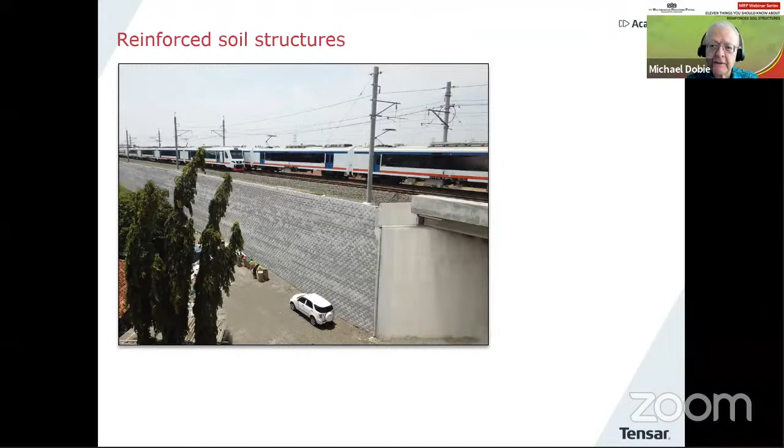And then one last picture. This is actually a load-bearing bridge abutment. That's the sort of structure I want to talk about in the next webinar.

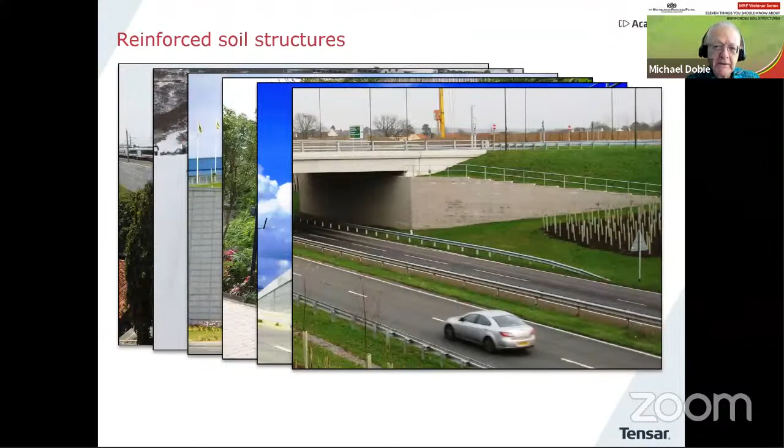So why did I choose this title? Well, it's because I find in working in this field for such a long time now that I think there are a few misunderstandings and confusions about some aspects of reinforced soil. And really, I've picked out 11 things. You might say, why 11? Well, 11 is quite a nice number.

It gives me about 5 minutes on each topic, which means I need to get a move on because I know how many slides I have to present to you today. But I could easily have 11 more. There are many topics that I think require discussion in this particular field, but let's see how we get on with these topics today. As I go along, as usual, these little blue boxes will appear from time to time to make a special point or to maybe ask a question or two. May even be related to the quiz at the end of the webinar.

The material is aimed really at civil engineers who have some involvement in the planning, design, or supervision of reinforced soil structures. I hope the information could also be of interest to more experienced geotechnical engineers or geosynthetics specialists.

I use 3 main abbreviations to save writing things out when I make the slides, so these get used quite a lot. RSS, reinforced soil structure. RSW, reinforced soil wall or retaining wall. And RSB, the reinforced soil block, that's the block of soil that's actually reinforced by the geosynthetic material.

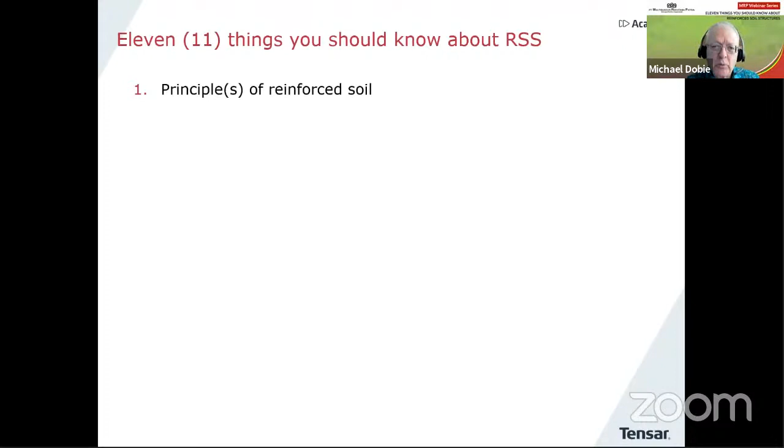I could list to you right now the 11 items, but I thought rather than that, let's just bring them on one by one. So we'll start off with something about principles of reinforced soil.

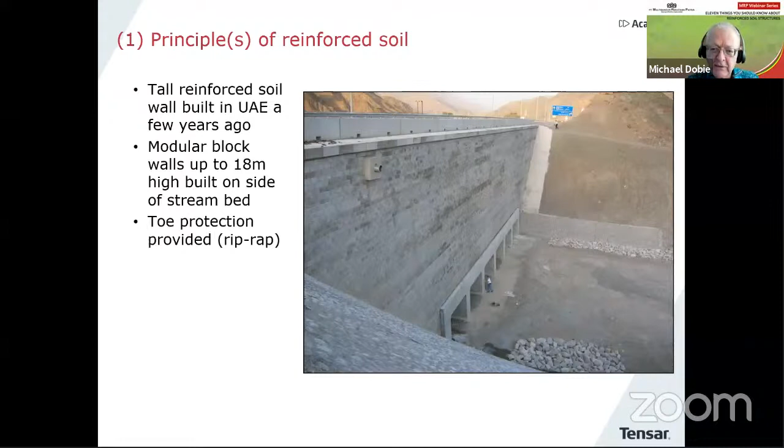Here's a nice picture of a wall built a few years ago in the UAE, 18 meters high, quite big. You can see that the toe has been protected by some riprap because this is a stream bed. And you can see the width of the stream here in another view on the same project, quite a big stream bed.

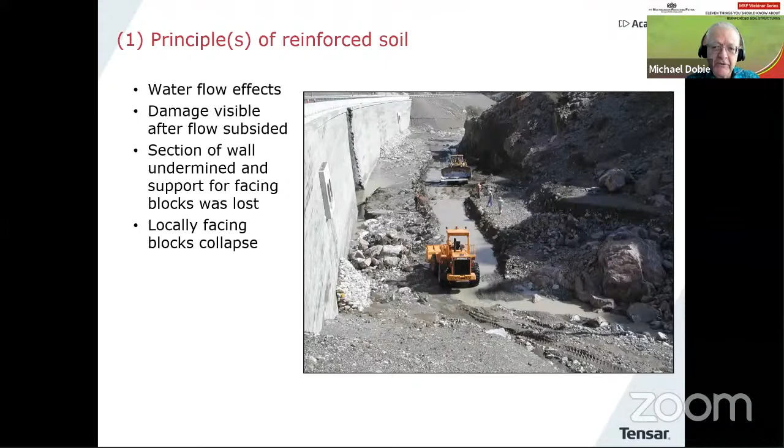Let's just go back to the beginning again. There's the initial picture. You can now see what happened. They had unfortunately forgotten to put the riprap over this section.

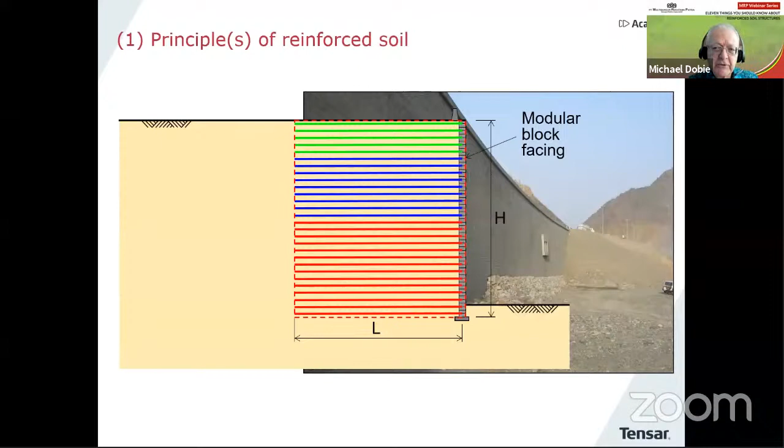If we think about a cross section here, what do we have? We have soil and layers of geogrid, designed to meet certain requirements, and on the front, a modular block facing. Let's just take away the background and look at the cross section. The important point here is that the RSB, the reinforced soil block, is the structure, and it's a composite consisting of soil and geogrid or geosynthetic reinforcement. The facing is there essentially to make it look nice, to prevent erosion of the soil at the facing, and also to provide some local stability at the face.

Unfortunately, what happened in this case was that there was erosion down at the bottom and the blocks dropped down. But what was very interesting is that despite this happening, the highway remained in service and the crash barrier remained intact. We can see it here in this picture along the top, after the facing fell away, and you can see there's no sign of any damage even to the crash barrier.

So this makes a very nice important point about reinforced soil being this composite. What did they do? Well, they repaired it. They put the facing blocks back until it was completed, and this time they remembered to add the riprap to protect the toe from water flows. So I think this is a very nice demonstration of how reinforced soil works as a composite, and also that it can withstand some pretty serious situations and recover very nicely.

While we're on this section, one more point I want to make, because I often see this on drawings: if you have a structure like this, do not pile the facing by itself. Sometimes it's little wooden piles, what we call cerucuk, but we often see them placed just underneath the facing. It's not a good idea.

If you do need to improve the foundation conditions, this should be done by treating the entire reinforced soil block width. So just a few more words about this reinforcement soil composite, because there's some work done here in Japan many years ago.

It was a trial wall, reported by Tajiri et al. back in 1996 in one of the Kyushu conferences. There's a simple cross section: 6 meters high, geogrids 3.5 meters long, roughly 1 meter spacing, with some secondary bits to make sure you don't get a local failure at the facing. You can see there the main properties of the fill and the reinforcement.

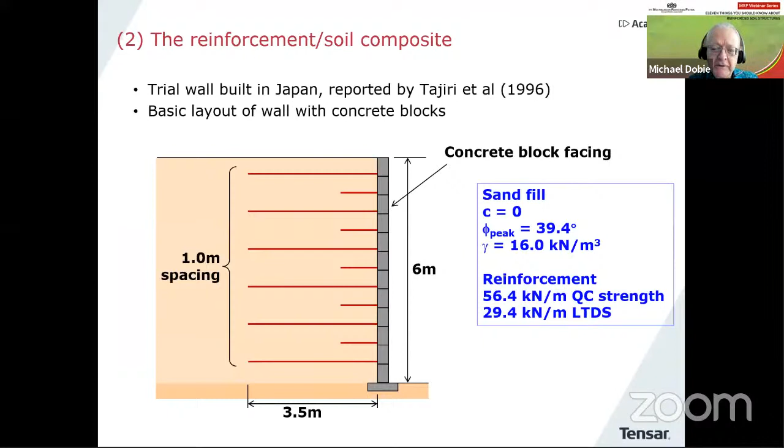Many trial walls were built like this years ago because people were trying to learn about the technique. But what was particularly interesting in this case is that the researchers arranged to cut the reinforcement inside the soil. They did this using electric wires embedded in the fill that could be made hot, and when heated, they would melt through and cut the geogrid. So they gradually reduced the length of the reinforcement. This is really the most incredible piece of work.

There's the first series of cuts, each removing roughly 30 centimeters of the geogrid, and then the second series of cuts. In the cross sections, brown is intact and green has been cut into short pieces, roughly 30 centimeters in length. The next series shows how they're shortening the geogrid further. Incredibly, they go all the way to cut number 60, and then the wall fails. Quite an extraordinary piece of work.

So what are we going to learn from this? If I go into a stability program—a slope stability program—I put in the initial geometry of that structure. There it is, you can see the spacings of the geogrid and everything connected to the facing. Sorry, I've drawn it the other way around, but I'm sure you can realize that. I can use a very nice non-circular analysis technique to investigate stability, which I'll explain in more detail later, but I'll just do it quickly now.

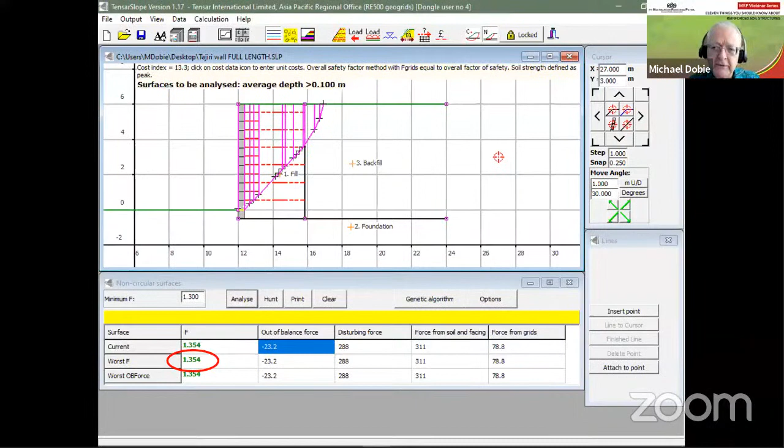But if I now go to the situation when they'd reached cut number 60 and do the same analysis, I get a very low safety factor. The structure is predicted to collapse—and of course it did at that stage. But just prior to that, it was perfectly stable. So there's something else going on in reinforced soil: an additional composite behavior which we're not really taking into account.

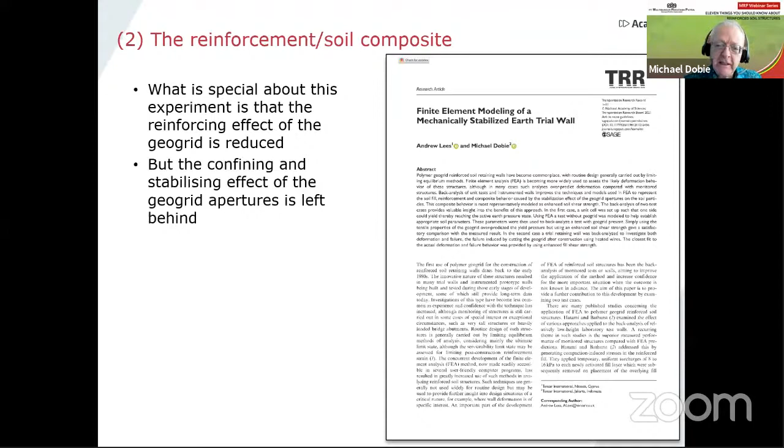Number 3: walls versus slopes, reinforced, of course. Is there a difference? Let's have a look at that.

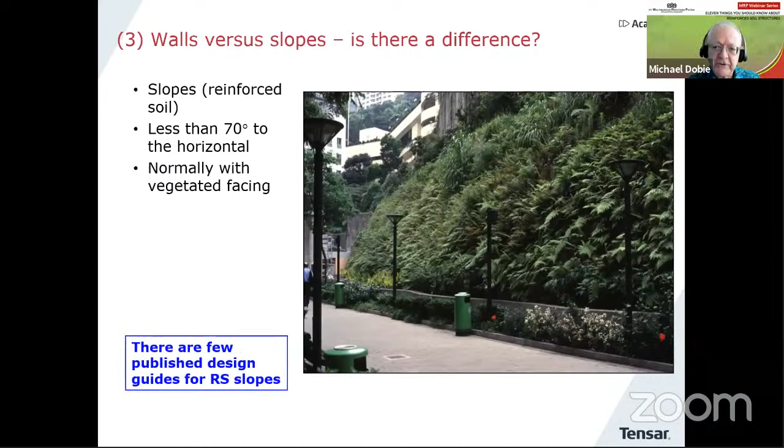There are differences from a general point of view. Generally slopes are defined with a facing angle less than 70 degrees to the horizontal, and normally have a soft or vegetated facing. In fact, there are not very many published design guides for reinforced soil slopes. When it comes to walls, they're normally steeper than 70 degrees, normally with a concrete or hard facing, and there are many published design guides for this form of structure around the world.

Let me show you something to give us a feeling about what happens as a structure becomes steeper. I've drawn a picture of a block of soil, stable at a certain angle. Now I want to add another thin wedge of soil with a top width of 0.1 of the height.

This gives us the facing angle, and from that we can calculate the weight of that slice. Then we put in the resisting forces from the soil, a normal force and a shear force, and do some calculations. I'm going to use a phi of 30 degrees.

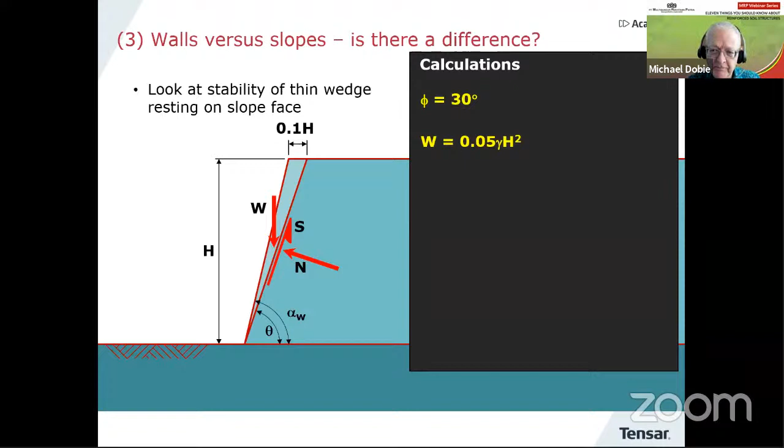We can calculate the weight of the thin slice and draw a force diagram because we know the weight of the slice and the direction of the normal force N. Because of the phi value, that limits the value of S, and what's happening is we cannot complete the force diagram. So the wedge simply slides off.

We know it fails. But from this I can form a relationship by plotting shear resistance in terms of the weight of the slice as the facing angle increases. The diagram looks like this: facing angle along the horizontal axis, shear resistance on the vertical. As the facing becomes steeper, the resistance from the soil is reducing simply because you're tipping it up more and more steeply, so it's failing.

I can therefore calculate S over W as the facing angle increases again, and go back to this graph to get the blue line, which is the resistance from the soil when reinforcement is added. The difference between the two is the additional soil resistance generated due to the presence of the reinforcement. As the structure becomes steeper, the generation of additional shear resistance from the reinforcement gets higher and higher.

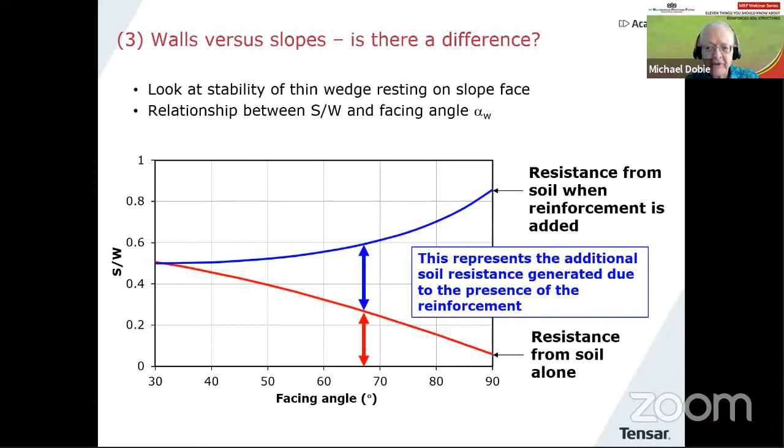For example, if we compare 45 degrees and 78 degrees facing angle, we get a much greater requirement for reinforcement. So is there a difference? Well, the first difference is there's a very different contribution to the internal stability from the reinforcement - it's much greater in retaining walls than slopes.

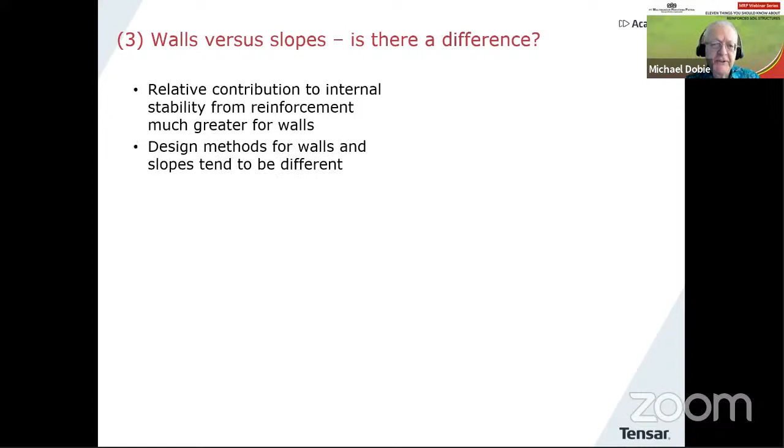There's also a difference in terms of design methods. Design methods for walls and slopes tend to be different, although if you analyze using something like limiting equilibrium or FEA, you can apply those methods in exactly the same way to walls and slopes. In fact, I tackled this topic in a paper published at an UNPAR event, the Slope 2019 in Bali. This paper, if you're interested, we can certainly let you have a copy - it looks at this whole issue of retaining wall design compared to reinforced soil slope design.

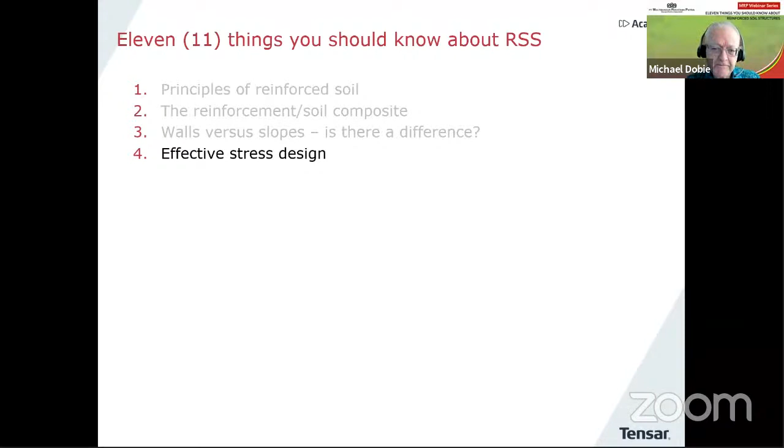Number 4, effective stress design. This is one of the most important things to get right. What do I mean by that? When designing a reinforced soil structure, here's a typical cross-section with 3 zones of material: a reinforced fill, a backfill, and a foundation. I've referred to them as S1, S2, and S3.

So which strength parameters do we use? Because we need for the soil layers unit weight and shear strength, and also, of course, if water is present, we need to take into account water pressure.

So what do we do? Well, we go to site, we get a nice big sample of fill, and then we carry out all sorts of index property testing to find out what the soil consists of. We maybe classify it, and then we normally do a compaction test to find out information about the optimum water content and maximum dry density.

And then having done that, we can prepare samples to carry out shear strength tests. But here's one of these blue reminders: the shear strength tests must be appropriate for the design requirements. Now, what do I mean by that?

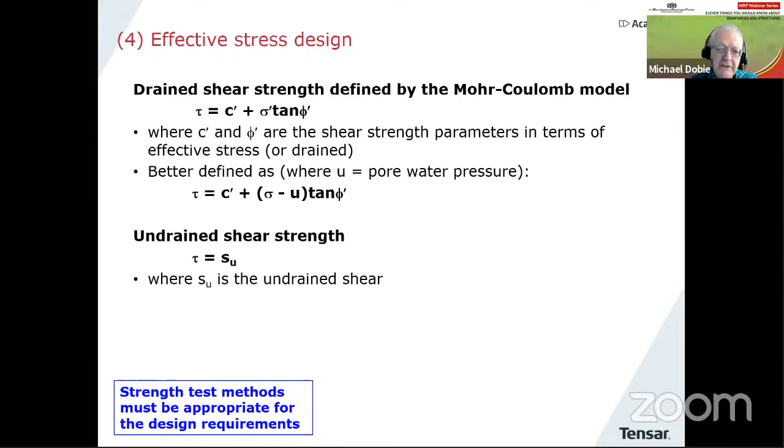Well, there are 2 principal definitions of soil shear strength which we use. The first is what we call drained or effective stress, where the important parameters are C dashed and phi dashed. And the dashed is important because it indicates that we have strengths in terms of effective stress. Then we have an alternative one, which is undrained shear strength, where we simply say the strength equals the undrained shear strength. These are 2 definitions which we use in geotechnical engineering.

And if we draw a little table of our 3 soil zones, S1, S2, S3, well, S1 and S2 are generally fills, almost always fills, but S3 could be a natural foundation soil. But the point is, for the fills, then for all soil types, coarse, fine, clay, whatever it is, then we use the drained or effective stress parameters C dash and phi dashed.

It's slightly different in the foundation, but that's not the topic today. We're just thinking really about the fills. We would never use undrained shear strength in the fill soils.

In fact, why do I put C dashed in brackets? Well, most published codes and standards recommend that you would use C dashed is 0 or a very low value for reinforced soil design.

Now, here's a slight problem, because when we look at available strength tests that you might use to determine these properties, then we are rather limited, especially for fine soils. So if we're talking about fine soils, and we're often using fine fills here in Indonesia and many other parts of Southeast Asia, then we basically have a choice of triaxial CU or CD tests or slow shear box testing.

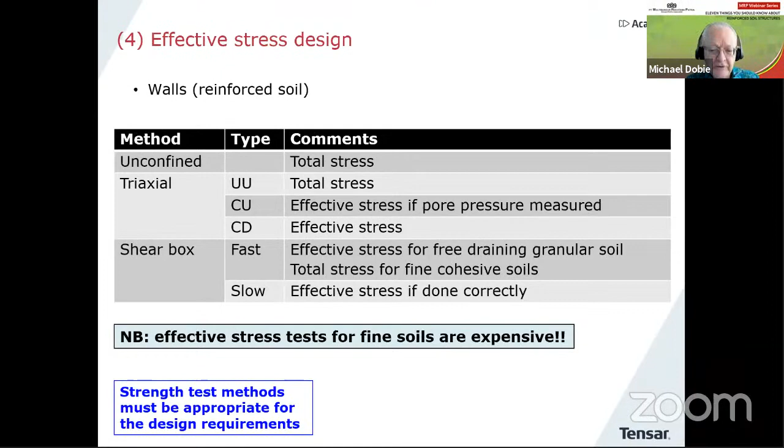And the slight problem is that effective stress tests on fine soils tend to be expensive, and this can lead to difficulties. Now, in the earlier webinars, in particular MRPs 1, 2, and 3, I went into some detail about soil properties, index properties, also using the shear box and also the triaxial test.

So if you want to know more about that, I'd suggest you look back at those. I think they're easily available if you'd like to review them, both as a video, and also there are PDF versions of all of those webinars. So there we are, extensive information in those earlier ones.

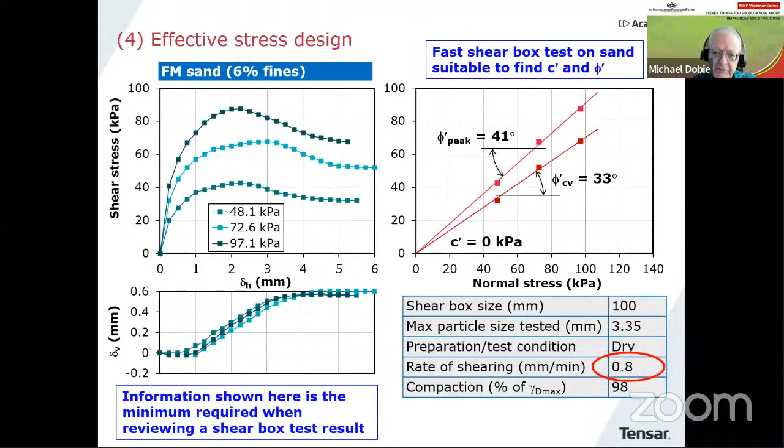And one of the really important things to notice here, it's a fast shear test, and the rate of shearing was 0.8 of a millimeter per minute, perfectly acceptable for a sand.

If I now switch this picture to a fine soil, so this is a similar test on a fine sandy clay, also a picture we looked at back in one of those early webinars, then we can get very nice results in terms of effective stress, in other words, C dash and phi dash for a fine soil, but the test has to be a consolidated slow shear box test.

So if you want to get suitable results from this kind of testing in terms of effective stress, then you need to test slowly. I made this point also back in the second webinar that the Indonesian standard which covers this test method appears to have a slight error in the way you calculate the rate of shearing. Basically, it's 50 times too fast.

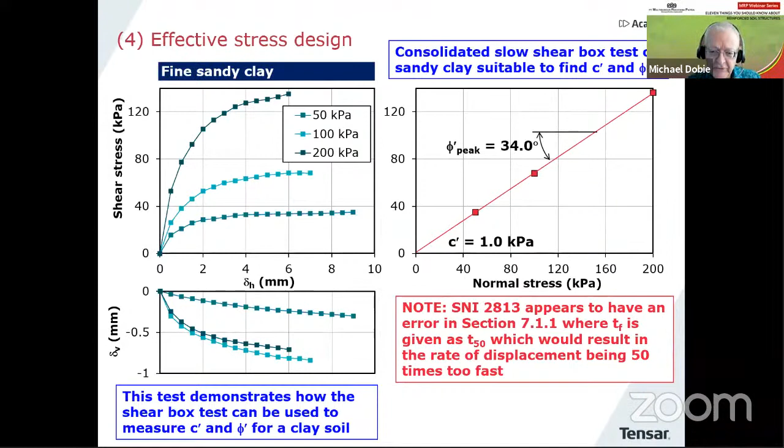Now, having talked about the importance of using effective stress and how we might measure it, I'm going to come to a special topic which I give a special title to. I did mention this in one of the earlier webinars as well, but I call it the high C, low phi problem in fine soils because I see it frequently.

So what do I mean by that? Let's take a table of some data here. This is from a site investigation report in Indonesia many years ago that I received. You can see all the nice information here, various index properties. Looking down the column on the left-hand side with values, and all the standards are mentioned there - Atterberg limits, a summary of particle size. And then at the very bottom, we have direct shear tests.

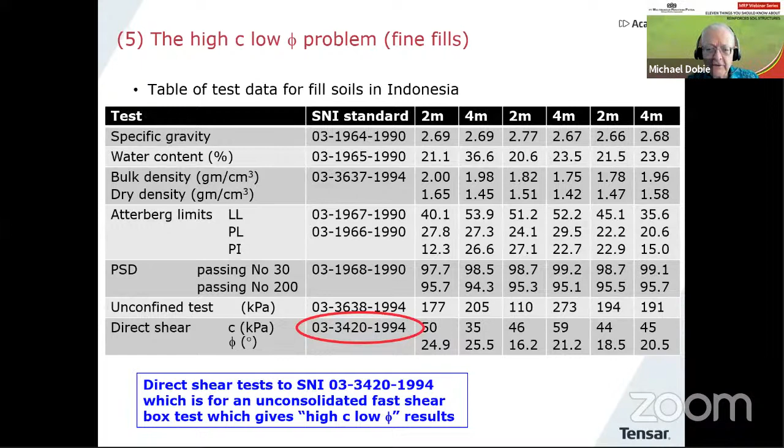Now, if you're presented with that data to design a reinforced soil structure, you shouldn't use it. You need to make some kind of reassessment and try to decide what would be a suitable C dash and phi dash to use, maybe based on index testing.

What's going on? Well, here's another picture of a shear box. It's just a shear stress, normal stress result. This is a fast shear box test on clay, and you can see we get this very flat line - so we've got the high C, low phi. Why is that happening? The problem is that the three normal stresses there, the sigma n values of 40, 120, and 200, they are total stresses, not effective stresses. We don't know what the effective stress is during the test because we cannot measure the pore pressure simply in a shear box.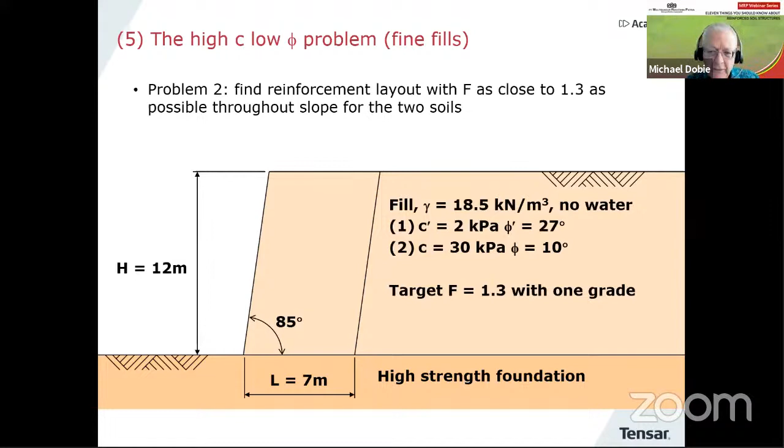What's problem number 2? Problem number 2 is to take the same situation and find a layout of reinforcement with the safety factor as close as possible to 1.3 everywhere throughout the slope. It takes a lot of time to do that, but not too difficult. With a nice piece of software, you can do that. So let's look at the results.

I've done this in a program called TensarSlope, and you can see there the layout of reinforcement. I hope you can make it out there, the red lines, the structure is 12 meters high. So we have a very nice layout of reinforcement, and you can see what we have is a closer spacing at the bottom and the spacing becoming slightly wider at the top with a gap of half a meter at the very top, because that was the maximum height without reinforcement. We found that earlier on. So this is what we expect to see - a typical layout of reinforcement to stabilize the structure of that height.

So we're happy with that, but that's for C' of 2 and phi' of 27 degrees, with the safety factor just over 1.3 everywhere. If I now switch to C of 30 and phi of 10, this is the required layout of reinforcement.

First of all, we have the huge 6-meter gap at the top because that doesn't require any reinforcement. But then we get a very dense packing of the reinforcement towards the bottom. It's not what we expect. Yet that's what you'll get if you use the high C, low phi to design a reinforced soil structure. It's clearly incorrect - no one would want to accept that as the design, but that's what you get from those properties. Safety factor still just over 1.3, same number of layers of geogrid.

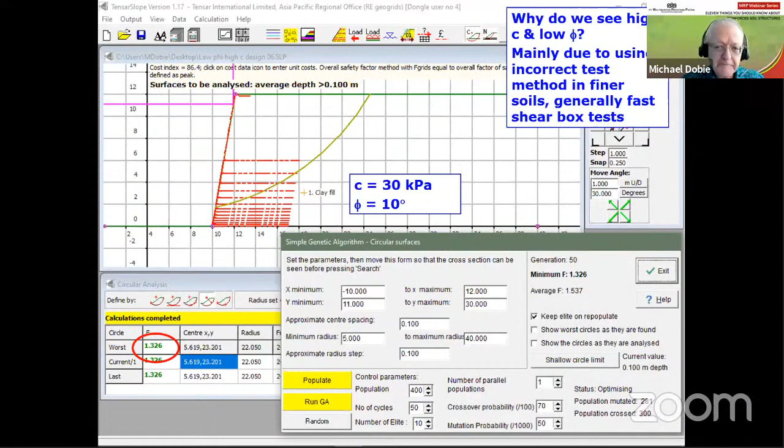There is a lot more information about clay fills in general in the 4th webinar. Again, you can see that or get hold of the PDF of these slides if you wish to. And that covers topics like pore pressures in clay fills and the importance of certain drainage measures that should be taken when you consider using fine fills.

And there are two kinds of interaction we want to understand: sliding and pull out. So how do we measure this?

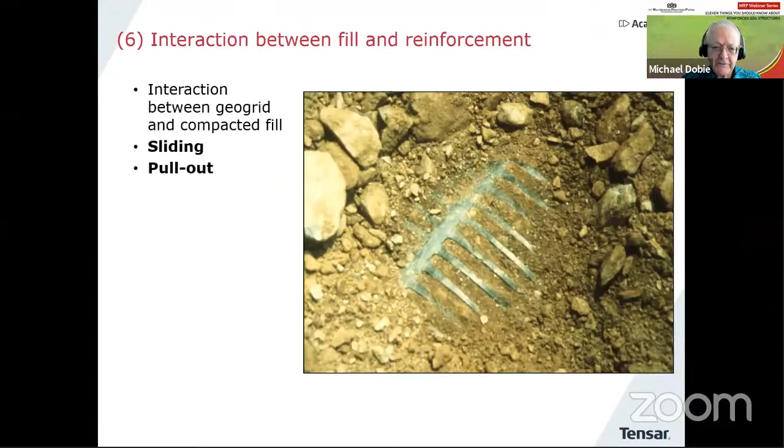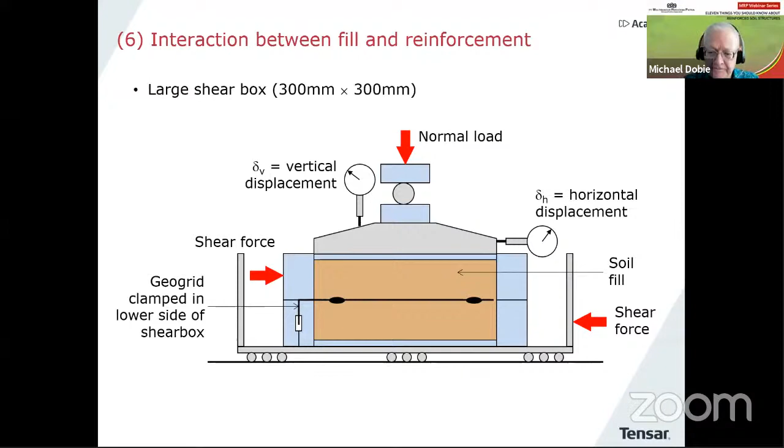Well, to get sliding interaction information, we carry out a large shear box test, and we adapt the shear box so that we can fix a piece of GeoGrid in the bottom half. Then we put the shear box together, fill up the top half with some fill as well, and carry out the shear box test. So what we'll have is a cross-section something like this, so that when we do the shearing, we're pushing the top half, which is soil, over the bottom half, which is soil and GeoGrid. So we get an indication of the effect of the GeoGrid on the sliding resistance. And of course, we normally do the same test without the GeoGrid to get a base value for the soil by itself. That's the sliding interaction test.

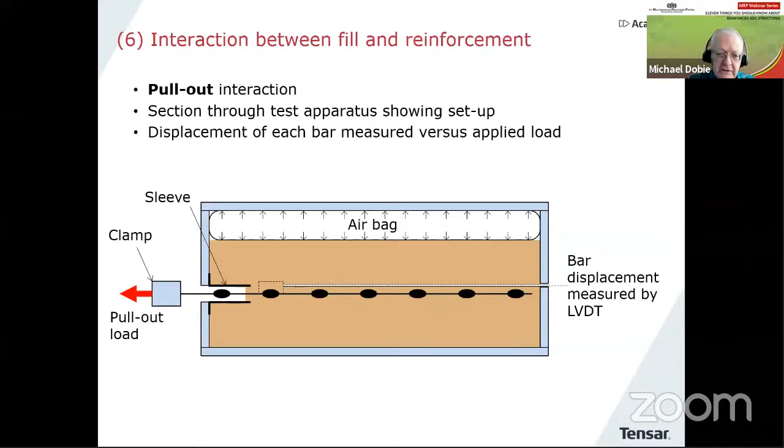This actually makes pull-out testing quite complicated and sometimes difficult to interpret. That's what a typical result looks like, especially when the pull-out is incomplete. For pull-out tests to work well, you need quite short pieces of GeoGrid, especially if the normal stress is high. Otherwise, you simply can't pull the material out.

Anyhow, I thought I would show you one important point. When we do interaction testing, whether it's pull-out or sliding, it needs to be an effective stress test, a drained test - if you remember the discussion earlier about effective stress design. That's easy for coarse soils, gravels and sands, no problem at all. But it's very difficult for fine soils. In my experience, there are very few published results of genuine effective stress interaction tests in the literature, simply because if you have a large shear box with clay fill, it takes a very long time to shear if you want to ensure it's an effective stress result.

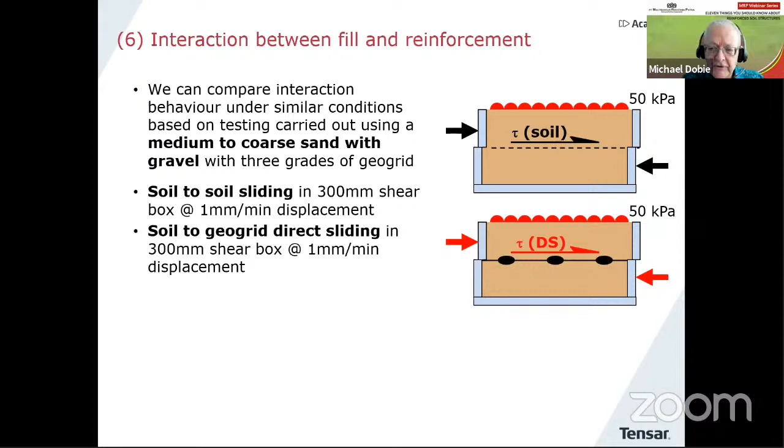We then do the test with the GeoGrid in it, which looks like this. Same basic test, except now we have the piece of GeoGrid clamped at the midpoint, giving us the effect of sliding over GeoGrid rather than sliding over soil, or sliding over GeoGrid and soil. Both are carried out at 1 millimeter per minute because it's a coarse soil.

Finally, we have the soil-to-GeoGrid shear generated by the pull-out test. This is a slightly different situation because you have shear going on both sides of the GeoGrid. I'm going to show you a comparison of the shear resistance or shear stress generated on one side only in each case, looking at the graphs that follow. For all 7 tests - 1 soil test, 3 sliding interaction, and 3 pull-out tests - the one thing that's the same is a 50 kilopascal normal stress, about 2.5 meters below the top of a structure.

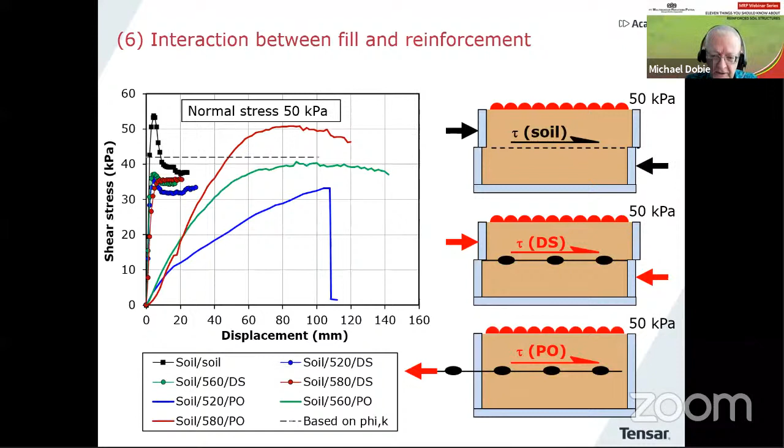But when it comes to pull-out, just looking at the shear - just a reminder that we have 3 grades of GeoGrid, you can see them in the legend: 520, 560, and 580. Basically the 520 is the thinnest and 580 is the thickest. So when we look at the pull-out test, it looks like this. We're looking at the shear on one side only, and we get those lines. The reason we go to much bigger displacements is that the displacement is measured at the clamp.

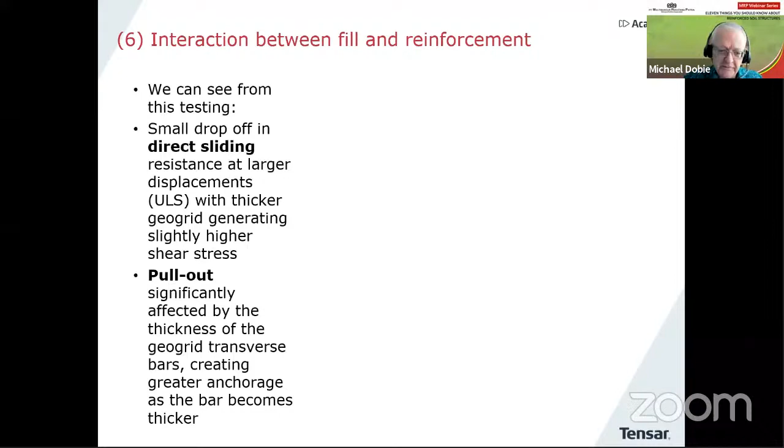So that was a few words about interaction testing and what we have to do to learn about it. But what about the relative importance of sliding versus pull-out? Just a few slides on this, but this is something where I see a lot of confusion, a lot of effort being placed maybe in the wrong direction when it comes to doing this testing. Let's have some words first, and then we'll demonstrate this.

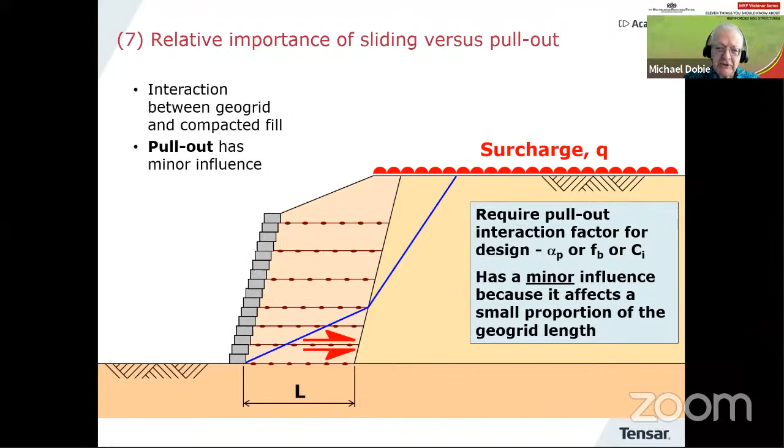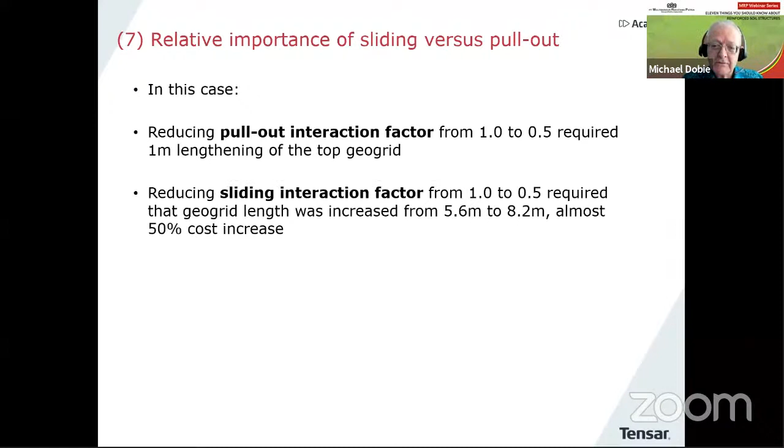I make this point because people are remarkably interested in pull-out resistance, and you get all sorts of research into it, and a lot of papers published about it. You get far fewer papers published about sliding interaction, yet that is actually the important one. And luckily, it's the easier one to do, because those 30 centimeter shear boxes can be found here and there, but a pull-out apparatus is quite rare.

Now we're on to number 8, and I think time is looking quite good. And I want to move now to a different but very, very important topic, which is all about durability and degradation of polymer reinforcement, and a few words about that.

If I look to European practice, then there is a European standard, 13251, which tells you about the requirements for using geosynthetics as reinforcement in things like retaining walls and so forth. And then there is a very good supplementary document, the technical report 20432, which gives a lot of detailed information and guidelines about determining long-term strength of geosynthetics for soil reinforcement.

If you want to see similar information in US practice, there is an AASHTO R69. I see from the internet the latest version is just last year, 2020. I don't have that version of it, I think I have an older one. But it gives you similar kinds of advice about how you should approach determining the long-term strength of geogrid, taking into account various things that can affect it.

And that's what I want to look at. Before I get there, I just want to talk about these modes of degradation. Now, these are diagrams coming from that technical report I mentioned, where they designate forms of degradation procedures as in 3 modes.

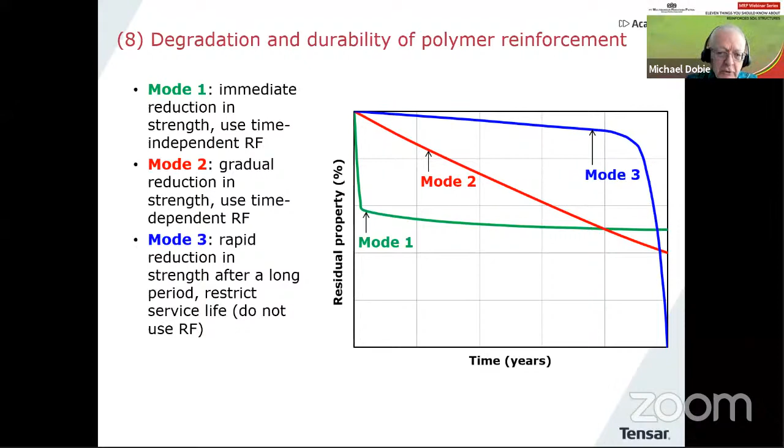And then there is mode 3, in which nothing much happens until you get almost to the end of the design life, and then there's a sudden reduction in strength. In this case, a reduction factor in the normal way doesn't make much sense, but what we have to do is restrict service life to make sure we don't reach that sudden downturn in that particular degradation. So those are very useful concepts.

So what I want to talk about in the next few minutes are some of the typical durability problems that we investigate. The four main things are weathering, which is UV exposure to the atmosphere, and then microbiological degradation, oxidation, and the effect of liquids, principally acids and alkalis, and others on strength of polymers.

I'm going to concentrate on oxidation. I don't have time to cover everything. These are investigated in two ways. We have what are called screening tests, which are relatively quick, and they're generally used in approvals, and also we have lifetime prediction tests.

The lifetime prediction test is similar to a screening test in some ways, but generally carried out over longer time periods, a bigger range perhaps of temperatures, and they take longer. But they are vital if you want to predict reduction factors for typical reinforced soil structure lifetime, of say 100 years or so.

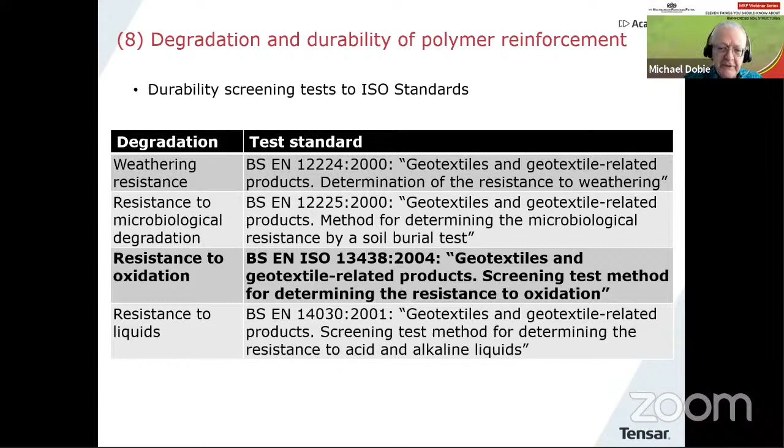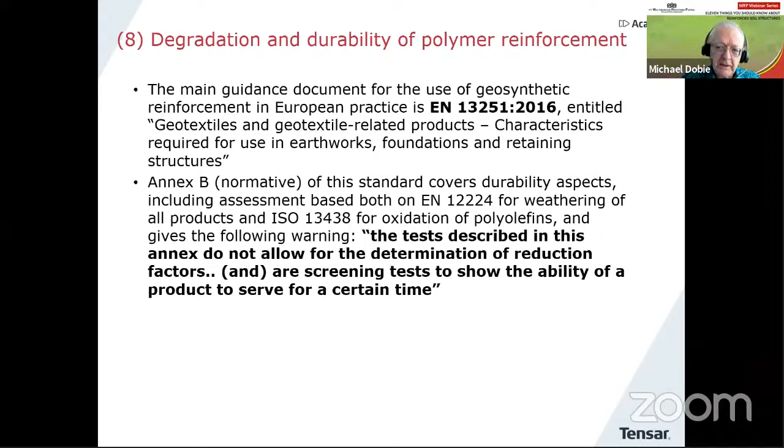Let's understand a little about screening tests, because European standard 13251 has an Annex B. I just want to make one point mentioned in this standard about these screening tests. It says the tests described in this annex do not allow for the determination of reduction factors and are screening tests to show the ability of a product to serve for a certain time. So these cannot really be used for long-term determination of the life of a geosynthetic reinforcement material.

Let's go briefly back to oxidation. I'm going to show you one way of examining it. Oxidation is one of the problems for the polyolefins like HDPE and polypropylene, so we have to look at it carefully. In this case we test using an autoclave, a cylinder where you put the material inside and apply high temperature and high pressure, taking out specimens from time to time to test what's happening to their strength.

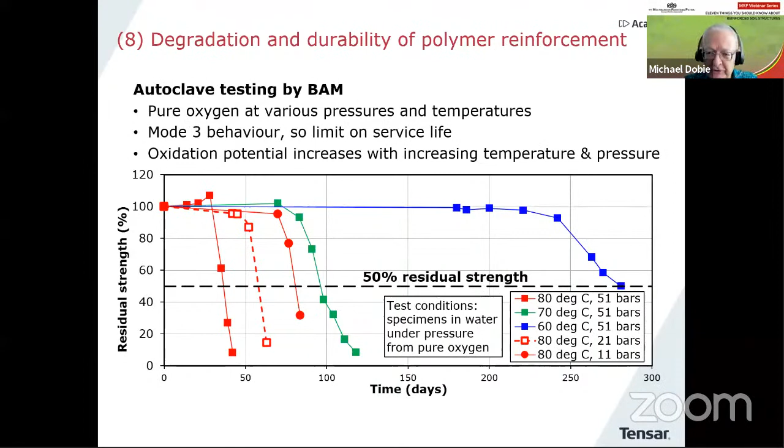From interpretation of this, which is a fairly specialist thing, we don't come up with reduction factors, we come up with design life. Even at 30 centigrade for this particular material, it's pretty high, almost 250 years predicted design life in terms of oxidation. So if we're looking at durability of either mode 2 or mode 3, this type of lifetime prediction testing is required to be confident about the long-term behavior of the material. Durability screening tests by themselves are not sufficient.

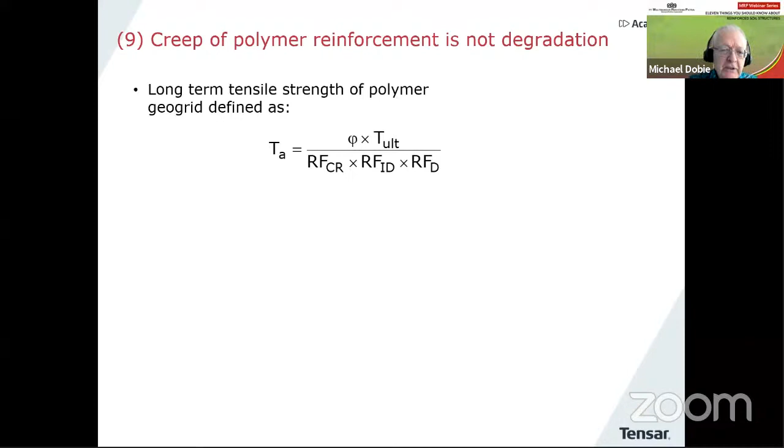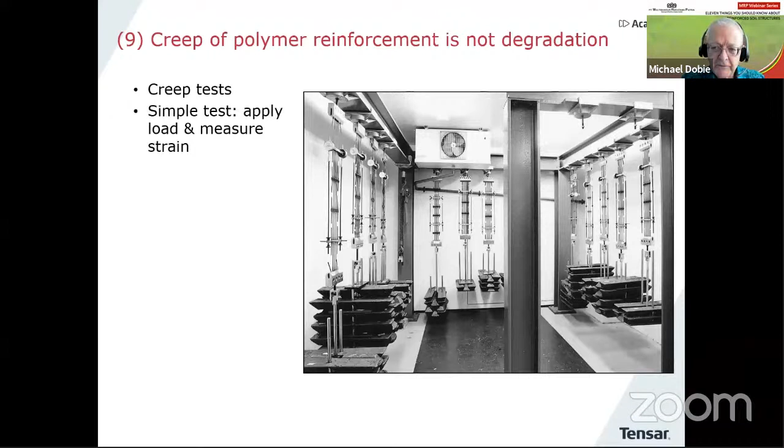What happens at the shorter times? Well, we can't really measure that with creep testing. It would be a bit dangerous to arrange a creep test to fail in a few seconds. But we can look at this with tensile testing.

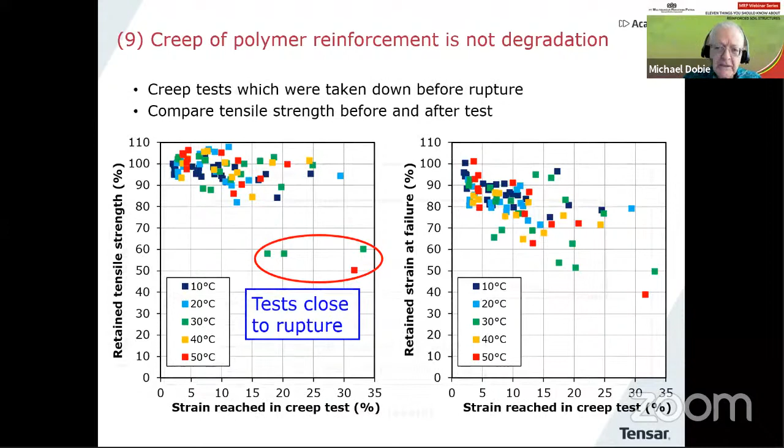And often people will look at that and say, okay, well, in that case, why don't we design for 100% tensile strength? Well, the problem was, if you do that, it fails in 30 seconds. We need to set that particular long-term strength to make sure that rupture occurs at the required design lifetime.

If we were to do a tensile test which finished in 3 seconds, it would look something like that. That's quite difficult to do. So we would then have a different reference. If we followed the ASTM procedure, which is a slower test rate for tensile testing, it would be the green line.

So one thing that's important to realize is that when you look at creep reduction factors, you need to be aware of the standard used to measure the tensile strength, because it can affect the creep reduction factor. Creep is absolute, but tensile strength depends on the procedure used to measure it. So just a little point to make from this.

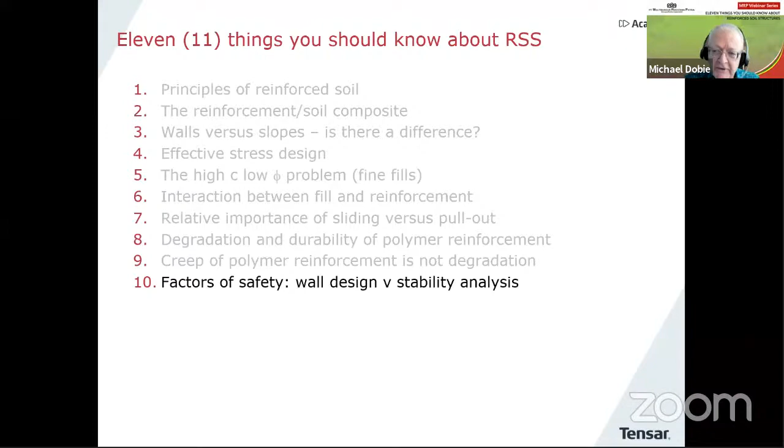Now, just 2 points to go, and I think we'll be through in the next 10 minutes. But this is one which I've seen confusion over: safety factors, wall design versus stability analysis. Let's have a look and see what I'm talking about.

The driving force would take into account the earth pressure, and the resisting force would take into account the weight of the soil and the frictional resistance on the base. Let's assume the sliding interaction factor is 1 in this case - it doesn't really matter for what I'm doing. So let's take some typical values: I'll make it 5 meters high, give it some properties, and then we'll do some calculations.

We calculate that resistance, which comes to 52 times the length, and we calculate the driving force, which comes to 75 - of course this is in kilonewtons per meter. Having done that calculation, to get a safety factor of 1.5, we simply put R equals 1.5 times S, and that gives us a length of 2.17 meters to get that required safety factor.

So let's change it now - let's make L 2.17 meters. That length is giving us the required safety factor of 1.5 against sliding on the base.

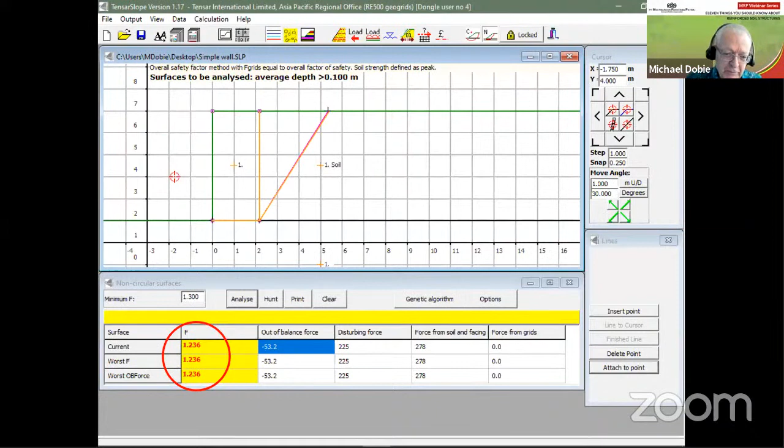But this is a rather important thing to realize - an important conclusion that when we look at either a wall design method or stability analysis, then we get safety factors, or we use safety factors. So if we have a 1.5 from the wall analysis, then when we look at the method of slices, which is applied to the soil shear strength everywhere within the soil mass, not just on the base of the structure, we get a different value. In nearly all situations, F from the wall design method is going to be greater than F from the method of slices in stability analysis.

Last thing, and I think we'll finish in the next 5 minutes. This is something which is a bit of a passion for me: the approach to internal stability calculations. I did use similar slides in a Tensar webinar not quite recently, but I think the audience today is largely different, so I hope you don't mind me using them again. When it comes to internal stability, I like to start with what I call extreme cases.

So if we have our block of reinforced soil without any reinforcement, and then the backfill behind it and the foundation soil, which we're used to in that particular cross-section, if we have no reinforcement, what's the critical failure surface? If you remember back to your earth pressure theory, you'll tell me almost certainly it's the Rankine wedge given by an angle of 45 plus phi by 2.

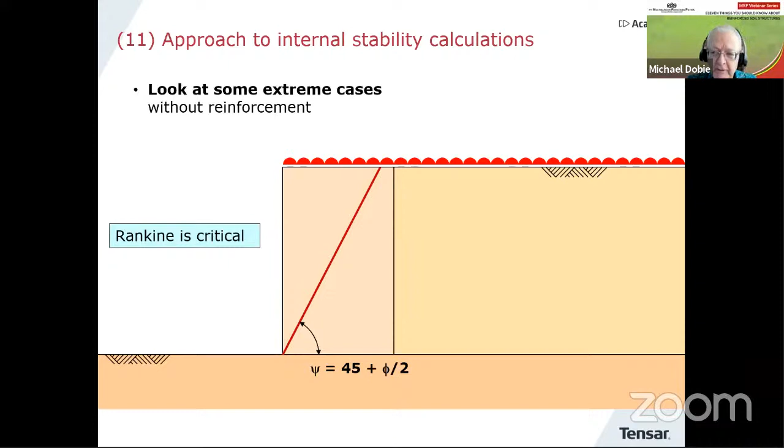And you'd be right. So let's go to another case. I'm now going to fill up my reinforced soil structure with reinforcement, but give it 0 strength - you might say that's a bit strange, however it's just to make a point. So what is now the critical mechanism? It's going to be the same, because if it has no strength, you're going to get that same Rankine critical surface.

Now let's go to another extreme case, and let's give the reinforcement infinite strength. That means the failure mechanism cannot touch it, because as soon as it touches it, it gets an infinite resistance. That means the critical mechanism is going to be a surface going in between the lower 2 geogrids and coming up the back at the Rankine angle.

That would be the critical mechanism. Let's now move away from these extreme cases to something less extreme. We'll now look at finite strength reinforcement. If we do that, almost certainly our critical mechanism will be some form of 2-part wedge in between those two extremes we looked at just now, something like that.

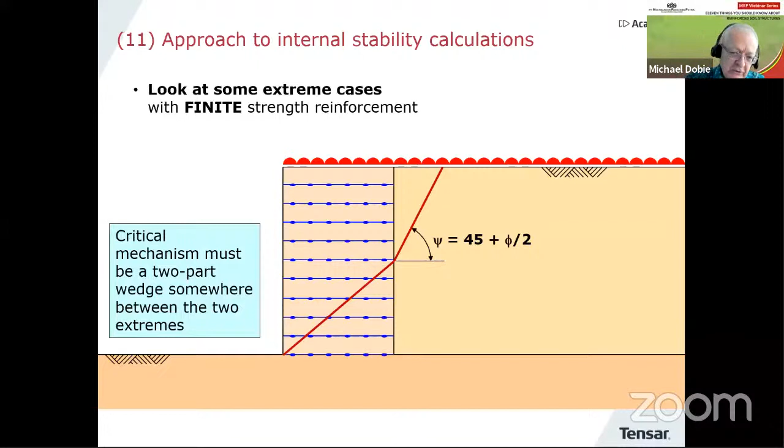If you think about this, you'll realize that if you have relatively strong soil and weak reinforcement, you'll tend to get your 2-part wedge somewhere up there. And if you have relatively weak soil and strong reinforcement, it'll come down, because the surface wants to avoid the geogrid as much as possible, so it comes down to a lower angle. So you're going to have a variety of possible 2-part wedge mechanisms depending on the situation.

One more extreme case is if I make the geogrid extremely long, but still finite strength, then the critical mechanism is going to come back to the Rankine wedge, like that.

All right, nice in pictures. But what about in reality? Is that what's going to happen? So I've looked at this using stability analysis, using a very nice technique.

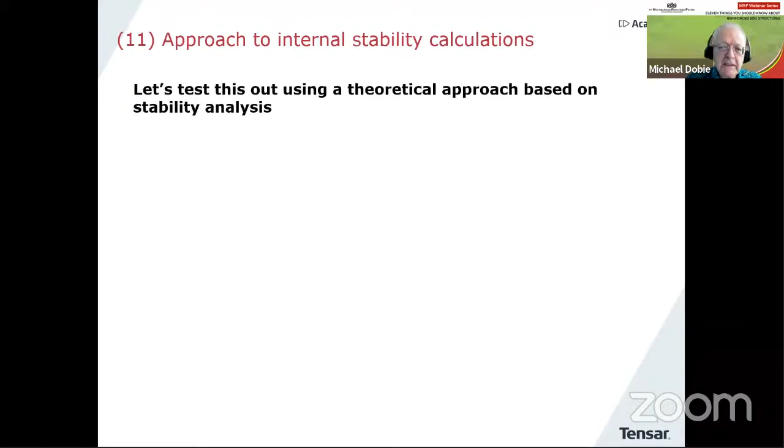I've used it already in this webinar, but I'm going to explain it in slightly more detail now. I've used a program called TensarSlope, with a very special non-circular search routine called a genetic algorithm, GA for short. The way this works is that we put in a random surface, and the program refines it until it finds the lowest safety factor.

In the particular case I'm going to show you, the random surface is made of 15 little lines, which means you could end up with almost any shape. If 15 random lines are our starting point, and we let the procedure refine this to find the critical surface, it could easily be a circle, or look like a circle, say like Bishop, or it could end up being a nice linear wedge, or it could even end up being some kind of exotic logarithmic spiral, which is a well-known mechanism often used in reinforced soil.

So let's go into the software and see what happens. Here is a cross-section: an 8-meter high structure, 5-meter long geogrid, with a surcharge on top. In this case I've set phi of 39 degrees, so quite a good fill, and the geogrid has a 28 kilonewton per meter long-term design strength.

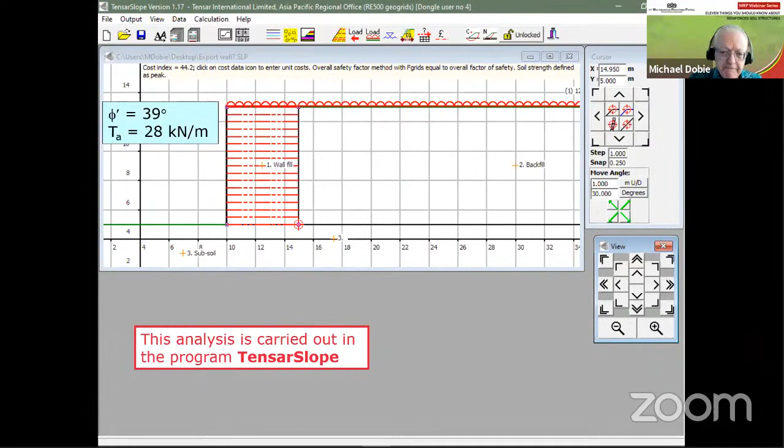I then open up my analysis window, open up this genetic algorithm, which allows me to populate the cross-section with random surfaces like this. It's a very nice thing to watch, and remarkably clever. Having done that, we run it and watch the program refine this down to find the lowest safety factor. By this point I've got 110 generations of the surface.

I find a safety factor of just over 1.3 for that situation, a very typical target. So here's the final analysis - you can see it's a really nice 2-part wedge that's been created. This is strong soil, weak geogrid.

I'm now going to switch over to weak soil, strong geogrid. If I simply analyze the same surface, which I have done, the safety factor is about 1.47, quite a lot higher. So what I'll do now is go back to my algorithm.

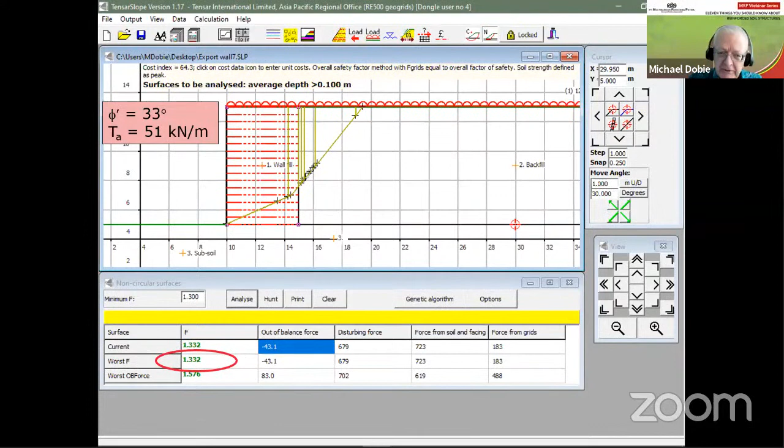I'll repopulate with random surfaces and run it again. As I do this, I see appearing in front of my eyes a 2-part wedge, but it's much lower down the structure now, like that. So that's the situation with weak soil, strong geogrid - safety factor also just over 1.3, similar to the previous one, but a different arrangement of soil strength and geogrid strength.

If I now make the geogrid very long, as in my last case, and analyze that, we get a safety factor of well over 2. So if I now run the algorithm again, what do I find? It reduces down to a straight line, which is essentially the Rankine wedge, with a safety factor just over 2.

So, the conclusion from this last point is that if you use tie-back wedge methods, which are used in many codes and standards, they rely on a single internal mechanism when they look at internal stability, typically the Rankine or Coulomb wedge. Everything is based around that one mechanism. What I've just shown you, that's not necessarily going to be critical.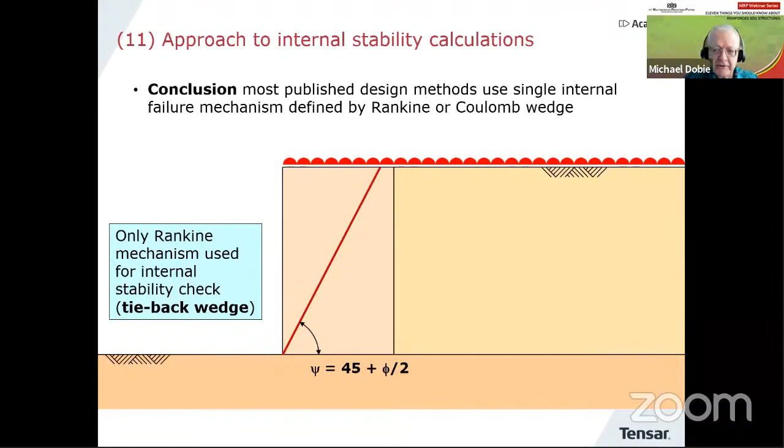So in the 2-part wedge approach, we don't do that. We look at many different combinations of 2-part wedges, from the base and at different levels up the structure, to find the best design. This offers many advantages, which I haven't got time to talk about today - that would be going into the second series of 11 points. But this offers many advantages over the tie-back wedge method.

So I've come to an end. We've covered these 11 points. I hope if you've managed to stay with me right through this, that you've found some things a bit different, things you hadn't seen before. But I hope it's clarified a number of points and issues when it comes to the design of reinforced soil structures. So thank you very much.

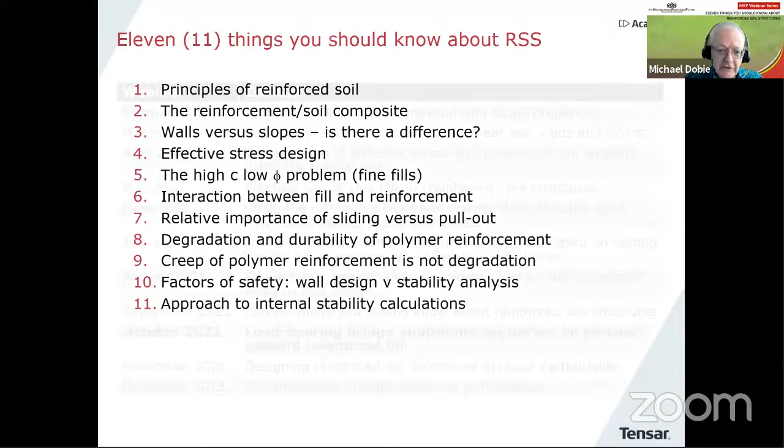Just to remind you that in October, there'll be a kind of extension of the topic today, where we'll look at a specific reinforced soil structure type, which is load-bearing bridge abutments supported on polymer geogrid reinforced fill. Thank you very much.

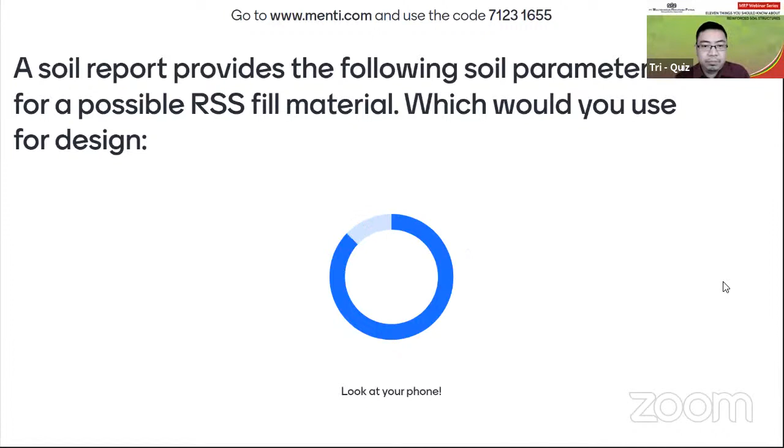Ayo kita mulai Bapak Ibu. Jawab cepat dan benar, pertanyaan pertama. Lihat di layar. A soil report provides the following soil parameters for a possible RSS fill material, which would you use for design? Pertama, SU equals 120 kilopascal. Kedua, C equals 35 kilopascal, phi equals 10 degree. Ketiga, C dash equals 2 kilopascal, phi dash equals 29 degree. Ayo Bapak Ibu, pertama, kedua, ketiga, cepat dan benar.

30 detik lagi. Pertama, kedua, ketiga, cepat. Yang nyimak nih bisa jawab pasti, gampang nih. Yang nggak nyimak jurus touchscreen aja langsung. ABC 1, 2, 3, cepat. Mau dapat hadiah harus cepat, cepat sama benar. Benar tapi lama nggak bakal dapat. 3, 2, 1, ayo waktu habis.

Jawaban yang benar adalah yang ketiga: C dash equals 2 kilopascal, phi dash equals 29 degree.

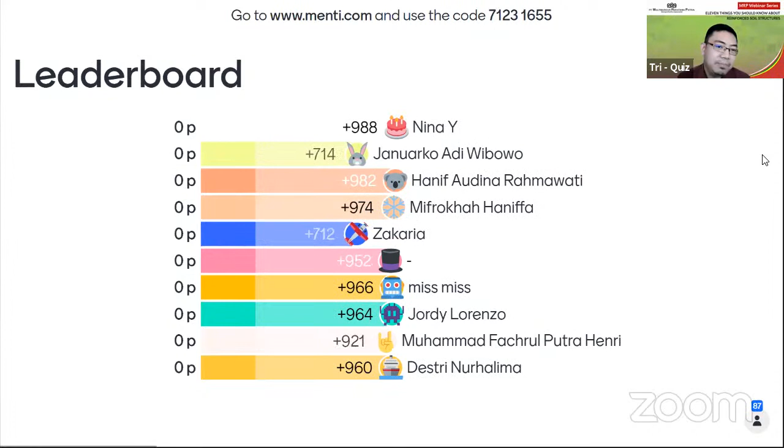Poin tertinggi kali ini diraih oleh, ayo siapa ini? Kita lihat, nah ini nyimak nih pasti poin tertinggi, nggak jurus touchscreen. Harus lihat, siapa yang tertinggi nih? Ya, tertinggi Ibu Nina Y. Wah, pertahankan Bu, ayo.

Lanjut pertanyaan kedua, jawab cepat dan benar. Mau dapat hadiah kan? RSW design calculation give Fs equal 1.5 for sliding on the wall base. When you check this using the method of slices, do you expect Fs to be: pertama higher, kedua lower, ketiga the same.

Ayo Bapak Ibu, cepat, pencet, touch screen, kayak warteg aja Bu. Langsung nyimak, cepat. Higher, lower, the same. Lumayan ya, buat makan siang, jangan ngantuk dulu. 24 detik lagi, 21, 20, ayo. Udah lama ini, yang lain udah, kalau jawab udah detik-detik ini. Lewat Bapak Ibu dah, melayang poinnya. Higher, lower, the same, ayo, yang nyimak mah udah set, merem udah dapat.

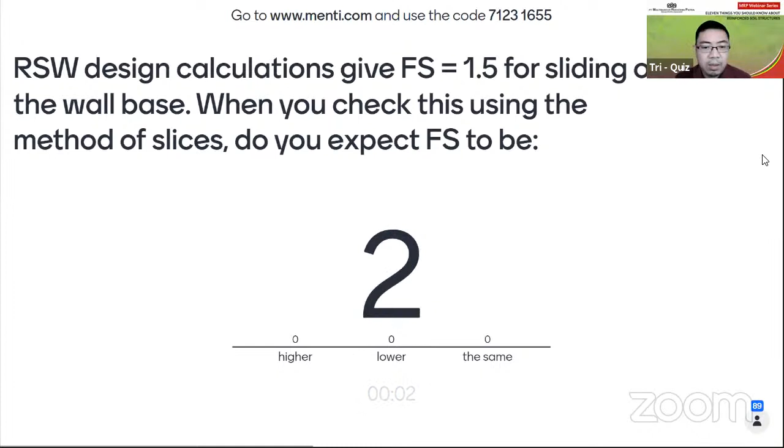Waktu habis. Jawabannya adalah lower.

Poin yang memimpin saat ini adalah, ayo siapa? Ya, Ibu Nina Y lagi. Ayo Ibu Nina Y, pertahankan.

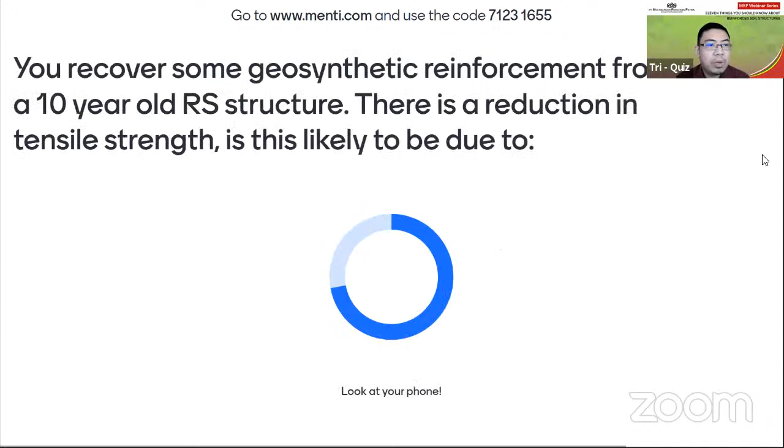Bapak Ibu lanjut pertanyaan ketiga, yang lain jangan mau kalah, cepat dan benar. Cuma 3 orang. You recover some geosynthetic reinforcement from a 10-year-old RS structure. There is a reduction in tensile strength, is this likely to be due to: yang pertama, installation damage and chemical degradation; kedua, installation damage and creep; ketiga, chemical degradation and creep. Ayo Bapak Ibu, cepetan, 1, 2, 3.

Juara keempat, kelima nggak dapat Bapak Ibu, tapi tetap saya kasih ucapan terima kasih, dapat sertifikat. Cuma 3 orang yang dapat hadiah, yang keempat, kelima, dan seterusnya dapat sertifikat. Tenang aja, 20 detik lagi, 19. Harus cepat, aduh. Kalau nyimak tadi, merem aja udah bisa jawab. 7, 5, 3, 2, 1, habis time out.

Jawabannya adalah yang pertama, installation damage and chemical degradation.

Pemenangnya adalah, kita lihat, ayo. Bapak Zakaria dengan poin 2959 poin. Dan kedua, siapa nih? Mifrokhah Haniffa, ketiga Antoni Gunawan. Wah, Bapak Antoni udah langganan ini.